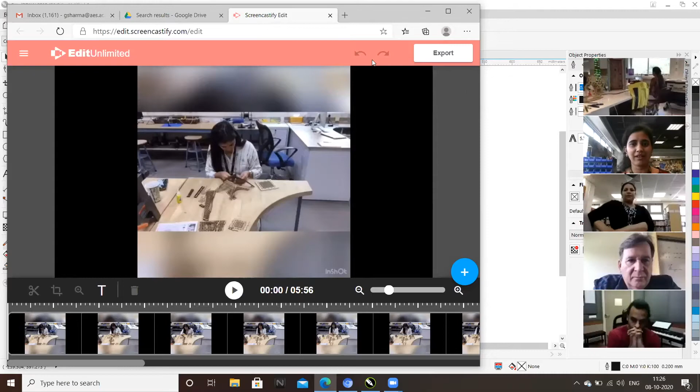Okay, it is visible. Yeah, not to me. Oh, there it is. Yes, okay, yeah, perfect. Let me just... okay, let's start with this one. Can I have this? How to go back? Oh, I need to stop sharing. Okay, then I'll come back, and then I need to focus.

So here, if we focus, I have prepared some laser cutting experimentation with cloth as one of the materials. MDF is another material which we most widely use when we do laser cutting. Then you have polymers also, plastic, to laser cut, and then you can even cut normal paper, A4 size sheet paper. Even different thicknesses of cloth can be used, and even glass can be used to laser cut.

With this Eiffel Tower, it's just 20 minutes of cutting process, and the rest 20 minutes is just the assembly part. But if I had to go prepare the same thing from 3D printing, I'll just show you.

If I talk about these two 3D printed objects, they took at least 1 hour to 1 hour 30 minutes for the white one, and 3 hours 30 minutes for the blue one. So once you're aware of the technology, you need to understand which application the technique or technology will work out best for, considering your time constraints also.

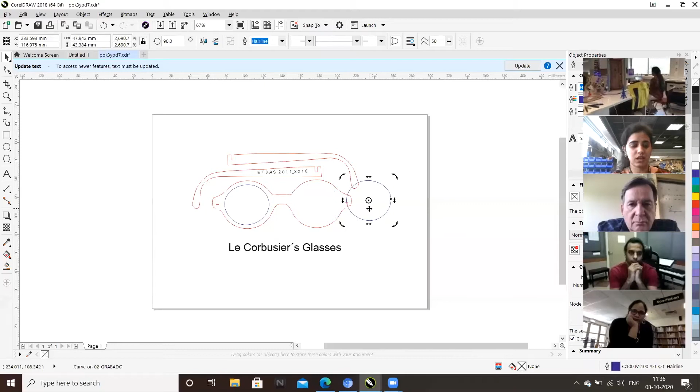Okay, you can just do a normal Control Z, it will come back. Now you will pick your item which you want to cut. When I say cut, I'm interested in the boundary area, so you have to go here and select hairline. Hairline is the instruction which allows you to cut out the object.

But for example, this text, I don't want to cut it out, I would like to engrave it. So to engrave it, you have to unselect the hairline first, and you can give any kind of color to it. For example, where's the color? Okay, let's use any color.

So once you give a color combination instead of the cutter color, it's like an engraving operation has to be done. So for the rest of the items which I want as the outline, we have to select individually and check whether they are hairlined or not.

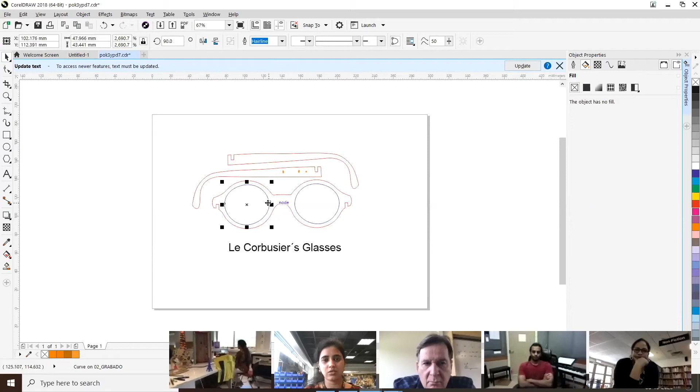So you have to again go back to the pick tool to select and check. Okay, this is also hairlined. This is also hairlined. What else do I need? The text - I don't want to hairline the text, so I have kept it none.

Now this text, if you want to cut it out, you need to give it an outline. Otherwise what will happen? It will get engraved, but you won't be able to take it out from the raw material. So you can have any kind of outline.

Let's have a rectangle. Now again, like a border? Rectangle, yes, border is your cutout.

So the border I have created and it needs to be hairline, but for the text again I need to go to the pick tool. I'll pick this - I don't want the hairline thing on it.

Okay, by default if you are using any text command, it will not give you the hairline feature because texts are by default engraved. As you can see, we don't have that hairline feature available, so it will get engraved only. Engraved means it will give the burning effect on each letter.

Okay, so this file is ready. You have to check this sheet size - this is the sheet size. Now I'll show you the machine bed size.

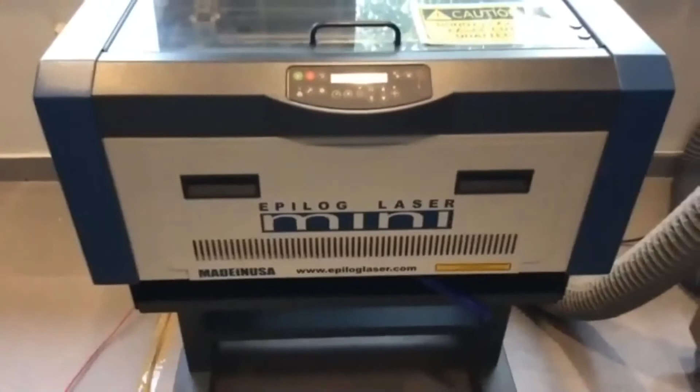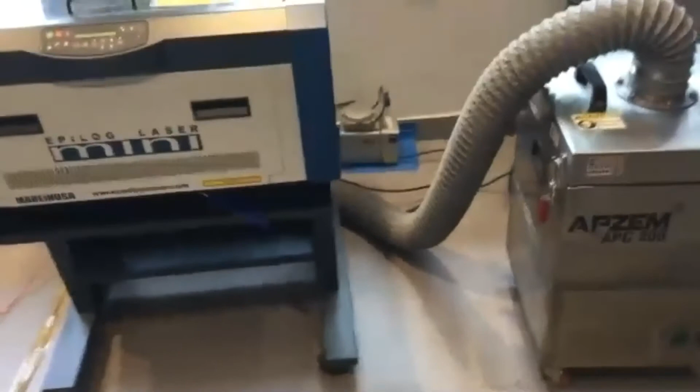So when you are working with the laser cutter, there are three different parts we take care of. This is your main laser cutter where this nozzle part is, from where the laser is going to come, and after that this is the main bed size which will decide how big or small a prototype you can make.

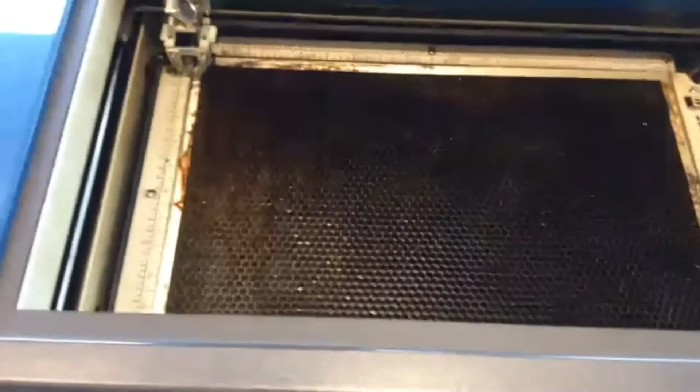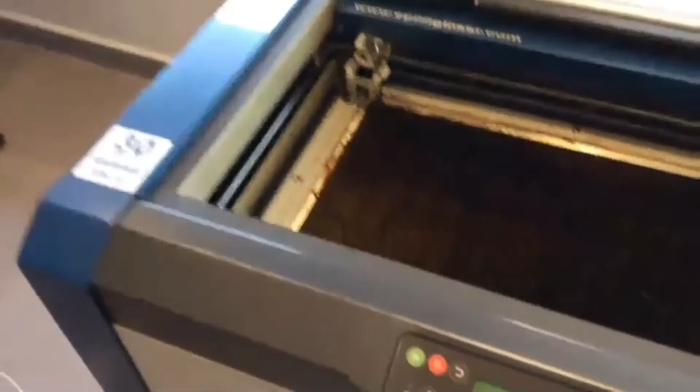Now to run a laser cutter you need compressed air so that you can maintain some cooling air near the burning surface, because the laser is at a very high temperature, so you need to provide continuous coolant. So we are using the compressed air.

Then we need some kind of extraction system also, because when we are cutting, we are actually burning something, so the smoke needs to go out. So this is your extractor, and that is your compressor. That was the whole thing about the machine part.

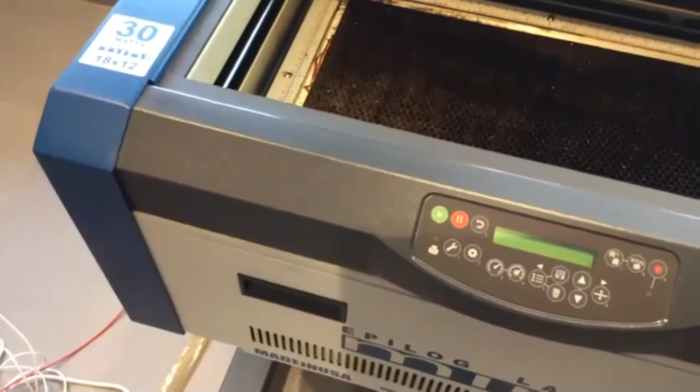Now, based on the bed size, you need to decide the size of the template you are working on in your slicer. Right now the bed size is 400 mm in the x-axis and 300 mm in the y-axis. So I need to consider this while preparing my slicing part. Let me share my screen.

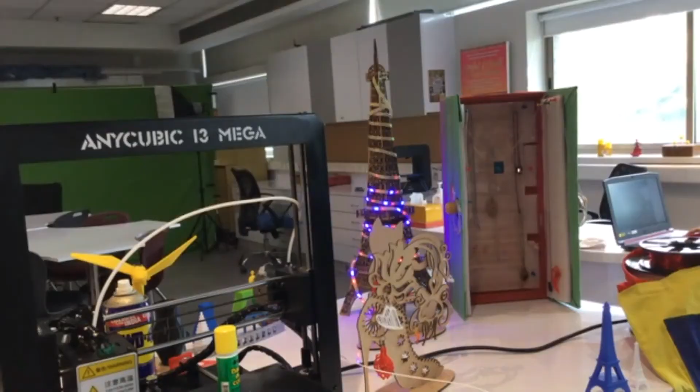This template size needs to be compatible with the bed of the laser cutter. Now how to set that? You just go to your layout, your page setup, and units are mm. I'll put the x-axis as more than 400, I would like to keep 450, and this I would like to keep 350. Rest I will not change. Done. Okay.

Now this is the actual representation of the bed size and the representation of my object where it is going to laser cut. Now all you have to do is give the print command, that is Control P.

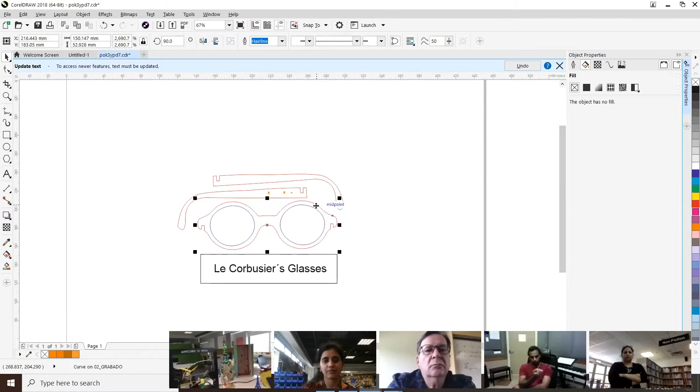From your printers option you have to select the printer which is displaying the driver for your printer. So there are a lot of copies. Why does it happen? Sometimes at the beginning when you are loading the driver, it will show you only Epilog Engraver. Then it's not allowing us to print. So in that case, we delete and install it again. We can delete this already if we are reinstalling it, but that way it never worked out. So by default, it will keep creating the copies. This is something which we are not doing, it's like a bug in the driver which is happening.

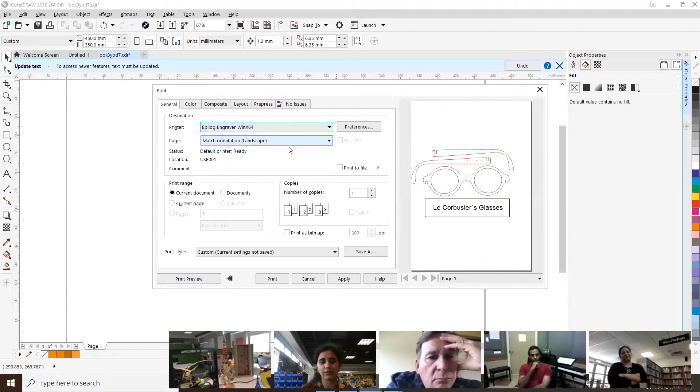So right now I'm selecting this printer, but chances are it will not allow me to print. So in that case, as a part of troubleshooting, in Hindi we call it jugaad, we have to go for copy 1. If that doesn't work, we will go to copy 2. So any of the printers will at the end work. Let me just turn on the printer.

This, I need to help someone. Sorry, I have to leave this. Sorry, I cannot hear you, are you saying something? Yeah, I have to go, I have to help someone. No worries, I'm sorry, I'll be sharing the recording. Thank you so much for your time. Yeah, thank you, thank you. Bye, thank you, Ursula, bye. Bye, Guda.

To assign the operations like cutting and engraving, we will go to the preferences. Now we have various options, like if you want to combine both things, you will keep this. You can arrange and adjust the speed and power. The speed is like the movement of your nozzle. The power is like how intense your laser is.

So this thing you'll keep as low as possible, and this you can vary, because you don't want to reach the highest intensity of your laser. Now when you are rastering, how much burned object you want, accordingly you want to keep the power. So right now I think I would like to keep it around 30, and the speed I can increase so that this task does not take a lot of time to complete. So let's keep it around 80.

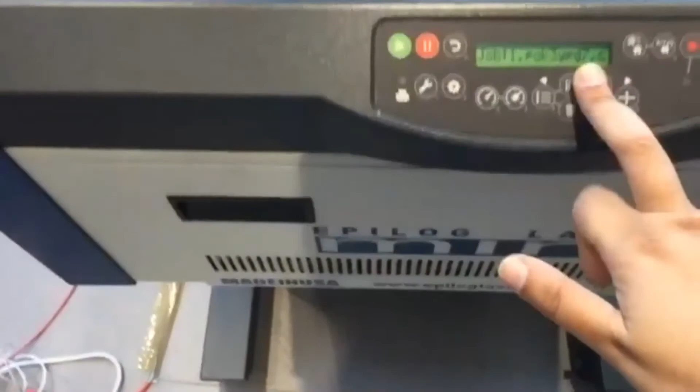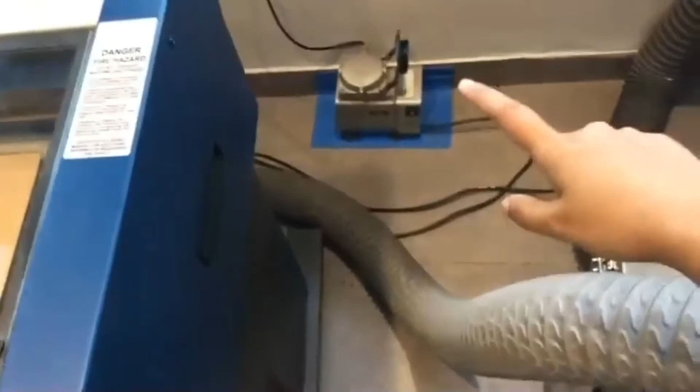Now when you are hitting the print option, let's focus on this. The main thing is you have to check whether your file has been transferred or not. When it is not transferred, you go for troubleshooting, selecting different printers and all that. Once you know your job file has been transferred, you place your raw material, close the door, your extractor should be running, your compressor should be running, and then just hit the play button.

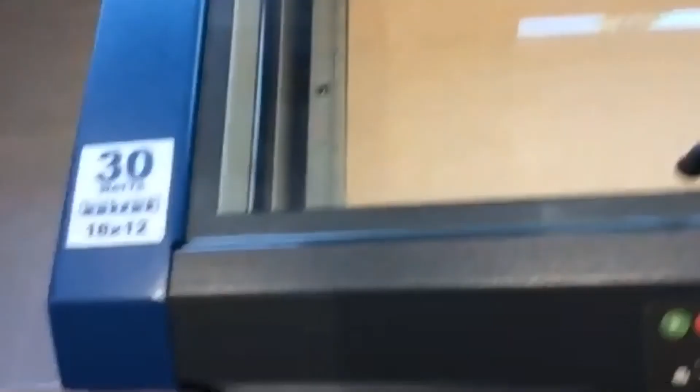Gargi, how thick is that material? I guess this one is 2 mm. Thank you.

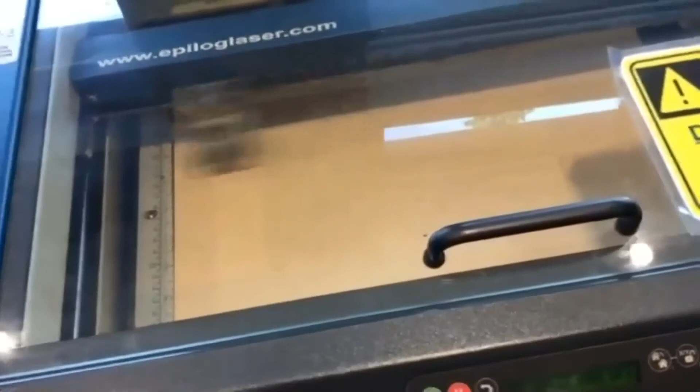So by default, it has selected engraving as the option to do first. Then it will go for the vectoring part, the cutting part.

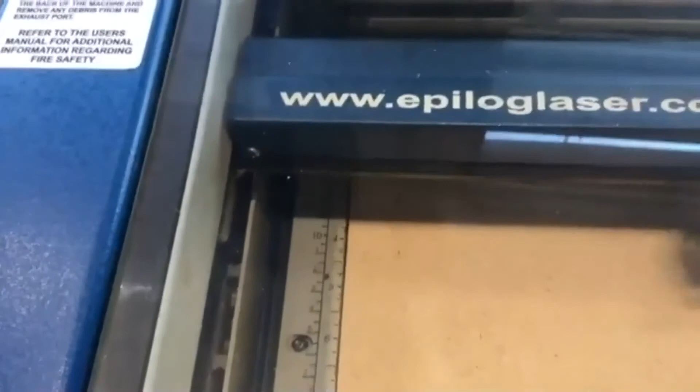Now it's small and it's difficult to visible, and I have to go for one more try. Now in this case, I'm lucky and I can just stop this also. If I stop it here, I can go back, modify my file, and then again give it for print.

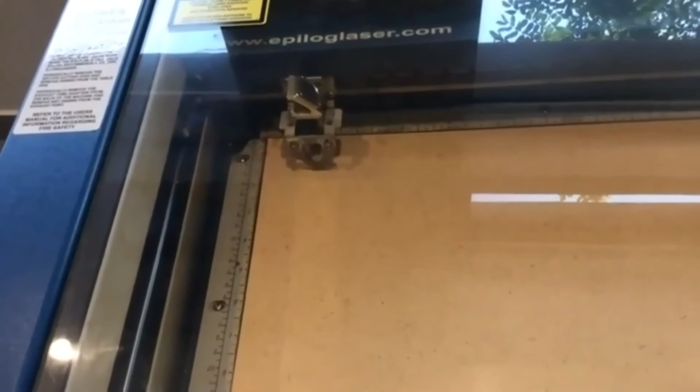But one condition is there: do not move your raw material, because if you slightly change it, the snap points will not be there. So it's better to, or maybe let the cutout keep on going.

I'll just show you. I'll prepare the file with different settings.

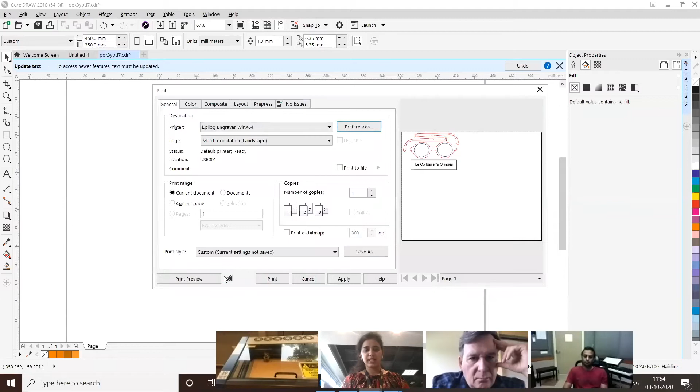Again print. Okay, now we have to first wait, once the cutout gets over. Then we will go and access the other file.

So meanwhile, let's discuss some other design, some other complications, some other stuffs.

Okay, let's open a fresh template. Now, when you are opening a new file, it will ask you the page setup properties. Just keep the same.

Okay, let's try to design something out of CorelDRAW itself. So let's have a keychain. Okay, I would like to have—I'll ask Tim what kind of boundary you would like to have for your keychain.

Oh, me? Yeah, oh, I don't know. Let's see. Overall, maybe a keychain, let's say 30 millimeters by 50 millimeters.

Because of the machine sound, I would request you to just type in your dimension. Oh, okay. All right.

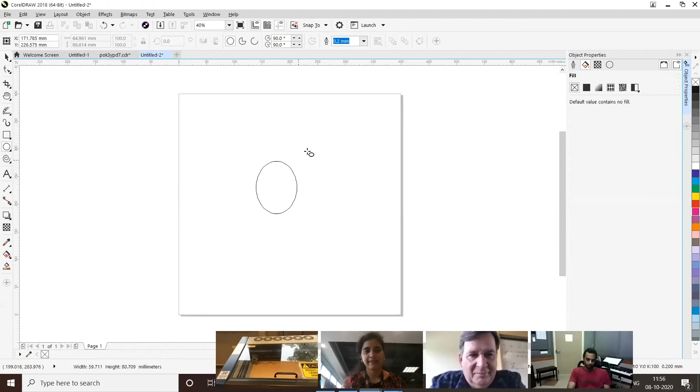Now you said, my bad, 30 by 50. Okay, so I'll again go back, pick the tool. I pick the object, and here it will show me what is the width, what is the length. So let's make this, for example, 30 mm and hit the enter button.

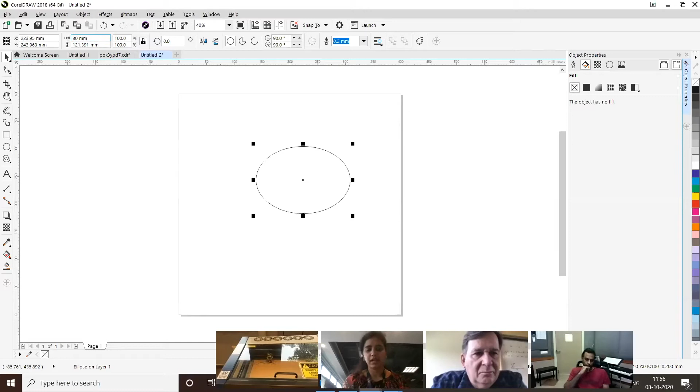Now when you hit the enter, it has proportionately reduced the length also. If you don't want to do that, just unlock this and you can separately give your length. Let's say 50.

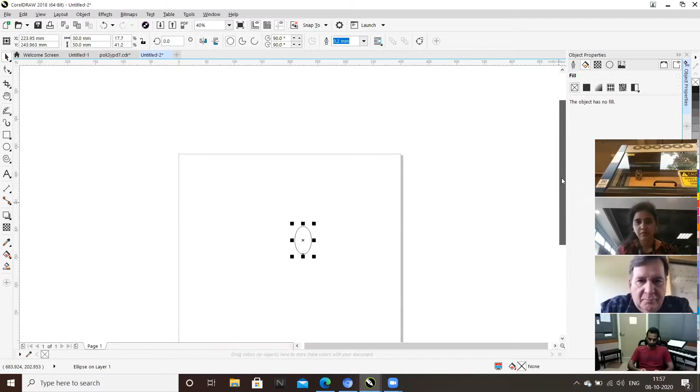Now in this, I would like to zoom this.

I'll keep this on hold because the cut is ready. You people can focus on the iPad screen.

Now on this, okay, now my engraving part has not come. So what I have done, I have sent my file earlier. So I'll just go to the back button and I'll find my file name is already there. Without touching the raw material, just hit the play button.

Now the issue is some part of your cutout is up, some is down. So again, if I go for the rastering part, it might not happen exactly. But let's take a risk. Let's go and take it.

It's happening, and it's as per the requirement.

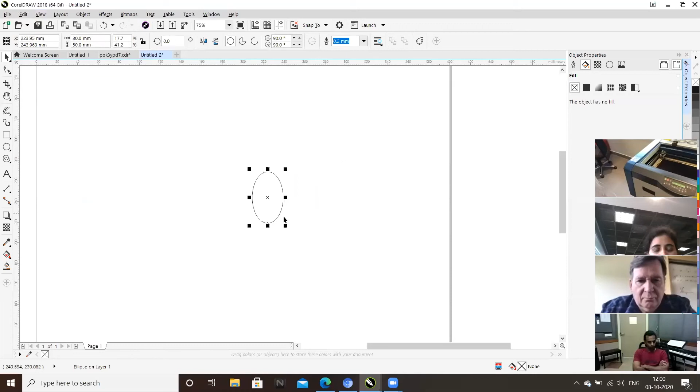Oh no. Okay, now on this one thing is I need a hole to put the key ring, so let's have the hole ready. Now I can just press the up and down arrow key to shift the hole wherever I want, or I can go here and change the positions. Sorry, these are your length and width. Positions are here, X and Y positions.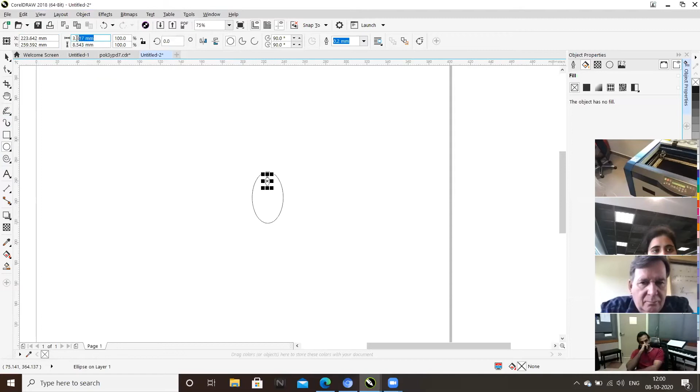I would like to keep the hole, for example, 4 by 4. And I'll again pick the tool. I'll go up.

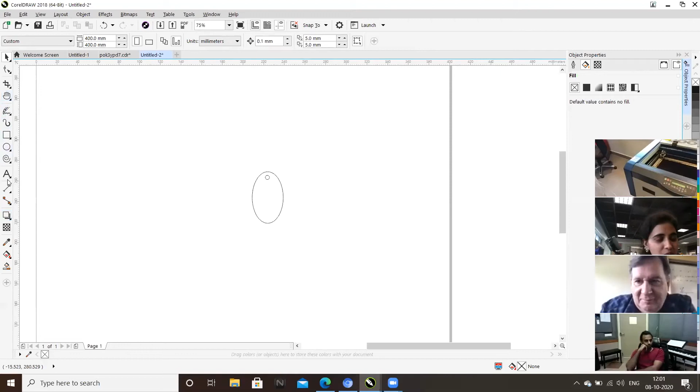Okay, now okay Tim, shall I put your name on your keychain or some kind of design you want? Your name. Okay yes, I'll put your name. I'll go for the text. Let's have Tim. Tim is sufficient, or should I write the full name?

No, that's fine. Okay, now let's reorient this, pick tool, pick this up. Now when you double click, it will allow you to rotate the text. Let's rotate it. Leave it, escape it, again select it, and there is a small plus sign. Bring your cursor there, it shows center, and move it wherever you want.

So how about Tim, what else would you like to have in your keychain? Oh, I don't know, the outline of a heart.

Sorry? I couldn't hear you properly, sorry. No, he said it in the chat. I put it in the chat.

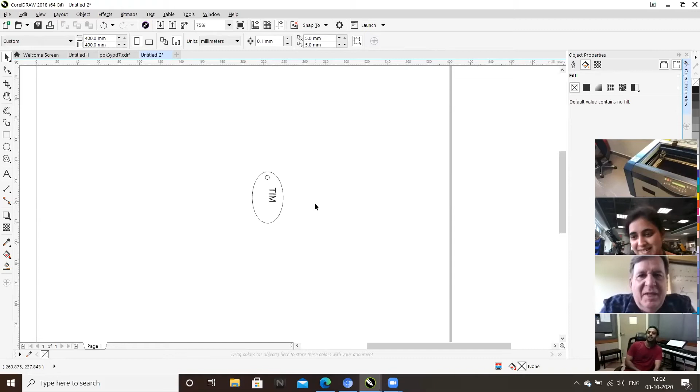Okay fine, let's go and search it for heart. Any particular thing, like what kind of heart shape you would like to have? No, doesn't matter. Doesn't matter? That's easy for me. No.

Let me pick this one. Now I'll just go right click. I would say copy image. I'll come back to the file and I'll just right click and paste. Now I can adjust it.

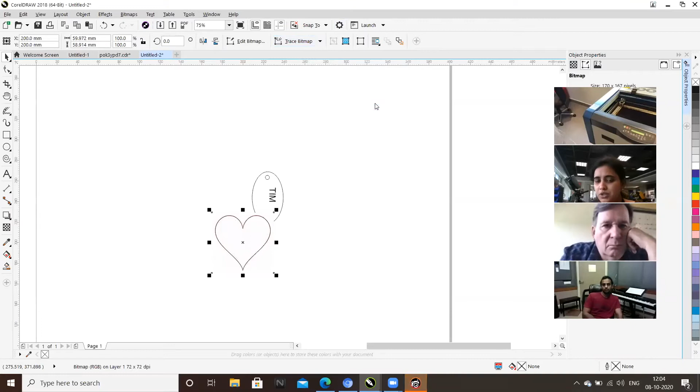Now here comes a little depth when you are working with image files. So if you want to convert an image file into a vector file, a file which can allow the cut, okay you need to go to the edit bitmap, sorry, not edit, that's the wrong option I clicked. Okay, so click this, go to the trace bitmap drop down menu, and then just go to the outline trace, and go to the clip art option. If you do that, it will allow you to convert your entire image into a vector file.

Now here you can control the extent of the vectoring effect. For example, I would like to smoothen it to the fullest, so no changes are there. In detailing, can I have more detailing? No, that's the maximum. I can reduce, but it will vanish.

Okay, this looks great, and yes, I would like to remove the background. Yes, that has already been merged. Okay, then just say okay.

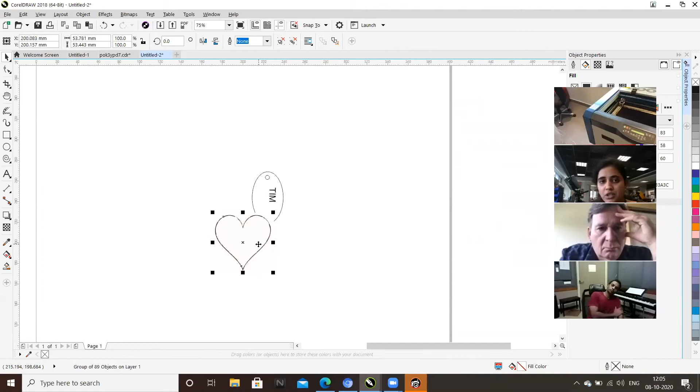Now what will happen, you can give a cut operation. So to give a cut operation, you will go here and pick the hairline thing, so the heart shape cutout will come out. So Tim, would you like to engrave the heart, or would you like to cut out the heart shape? Cut it out, cut it out. Okay, so let's cut, pick out the hairline.

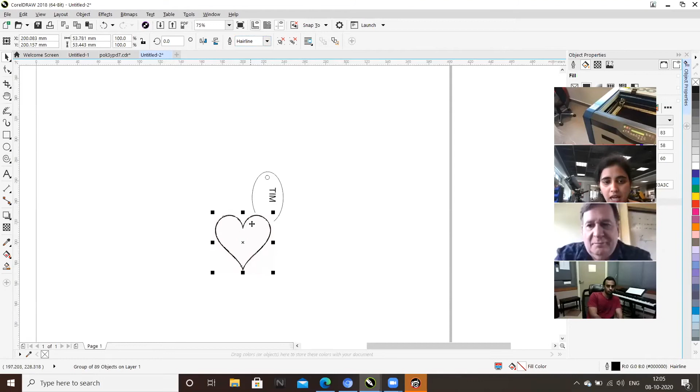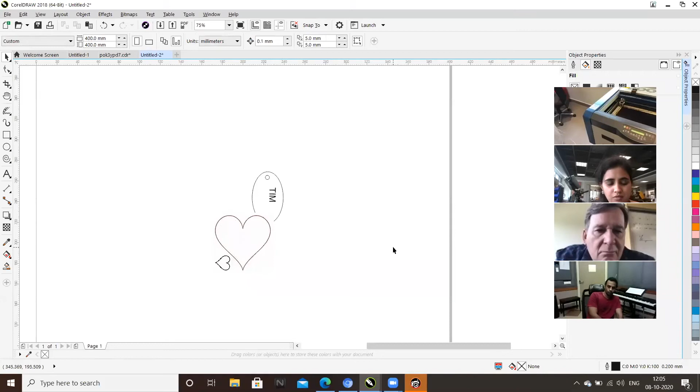Okay, now we can again adjust the size. We can rotate the image. I think twice I have copied it. Or maybe some other thing is there. I believe that's a graphical error because that has been deleted, but it still stays there.

Is this the correct position, or should I move it? Okay, perfect, now the design is ready.

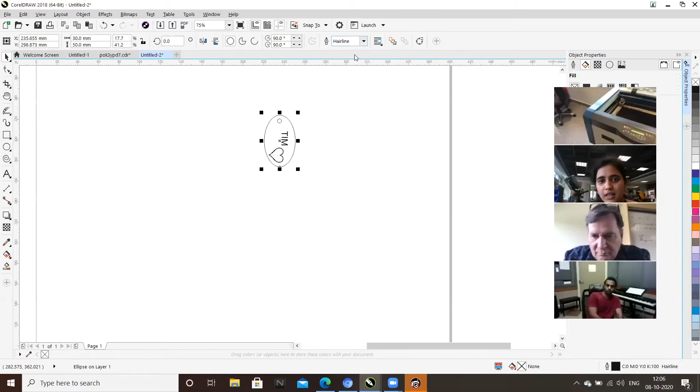This hole needs to be cut, so we will select this, we'll go and put hairline. The outer needs to be cut, we'll select this and go and put the hairline. Then you will select the Tim text. Now by default the text is always engraving. Okay, now this one is hairline.

Okay, now let's see the print preview. Okay, we would like to go to the preferences first. We have a combination and we would like to keep the same combination, but on MDF the speed needs to be slow. Let's have 10, and power let's do it with 80. Last time it was 80. And yes, this thing needs to be 450. Now let's see what happens if I don't make it 450.

Okay, I'll say okay. And by chance this was not, it was not coming here. Now why will it not come here? Let me show you.

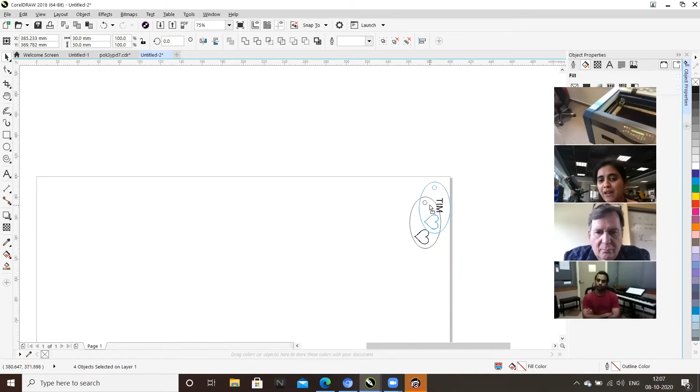For example, I was doing all my stuff here. I go to the print preview. I cannot see my object only. So to see the object, you have to adjust this size 450 as per the template size and the bed size 450.

Always try to keep more than your bed and template size. Now go to the preview option. You can select your object, drag it and give it a good place wherever you want.

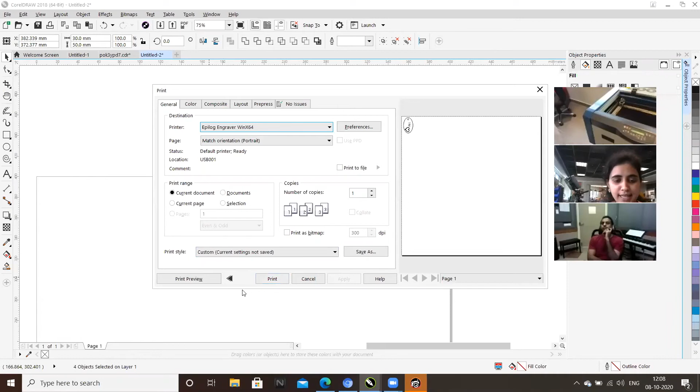You exit this and let's say, okay, let me turn on the laser cutter and I'll wait. Okay, so the resetting has been done. I'll just go and print.

So this time we are not lucky. Our file has not come. I have given the instruction, but the job is empty. So here comes the troubleshooting. As a part of troubleshooting, turn off your laser, turn it on.

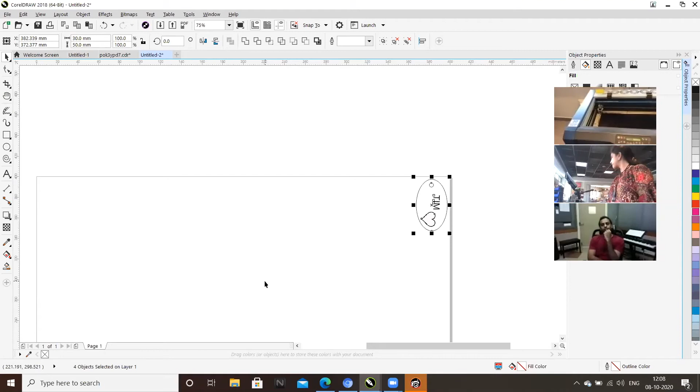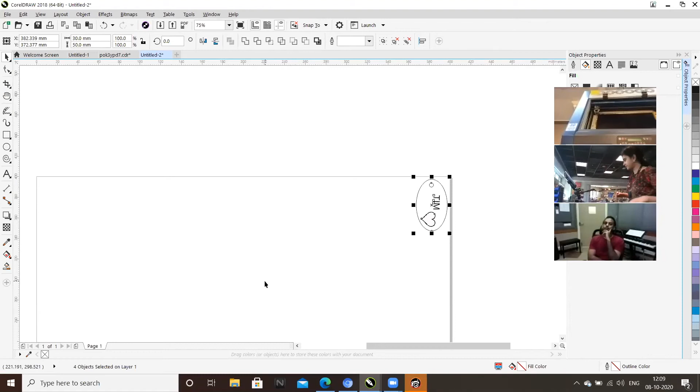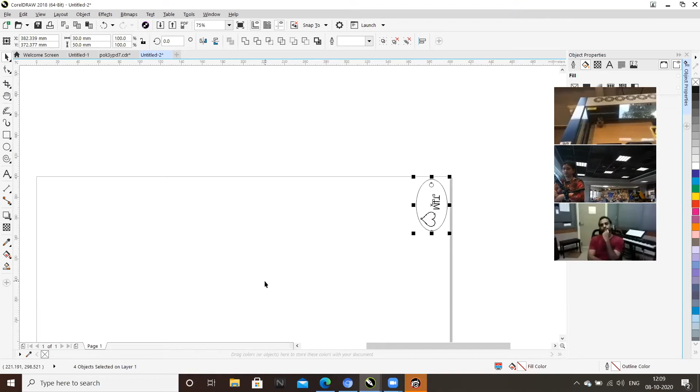Okay, Guna, this time it's you. So tell me, what kind of outline you would like to have for your outer edge? Which outer edge? Can you please type? It will be more helpful to me.

What do you? Yeah, I haven't attended the meeting. Okay, he left. Can you hear me? I'm sorry, I cannot hear you. As long as the process is happening, it's a lot of sound.

I don't want to make it a keychain. Okay.

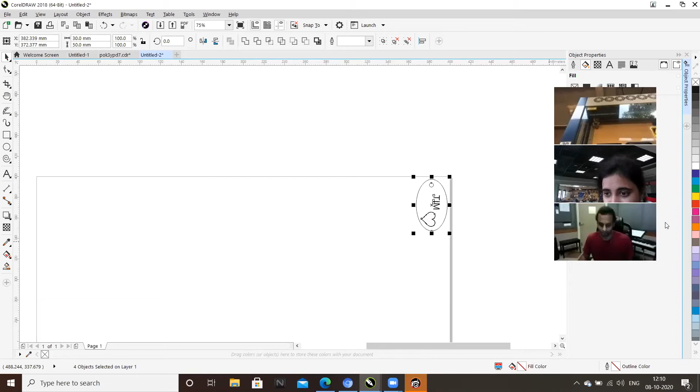Okay, let's take it out. This time the cut has not been proper. So I'll just keep it as it is. And I believe the snapping of the points are correct. I'll put this back, and it's already there. If it's not there in the machine memory, I would have sent again from the computer.

Let's say that's happening. I'll meanwhile prepare. I don't want to make any keychain. Oh okay, mobile holder or a desk stand. Yes we can. So for that, let's go and search out.

So you have to search for mobile desktop DXF files. Oh sorry, mobile. What was that? Mobile stand. Mobile stand here.

Subhana, why don't you search it on open source and send me the file link in the chat? Will that be okay with you?

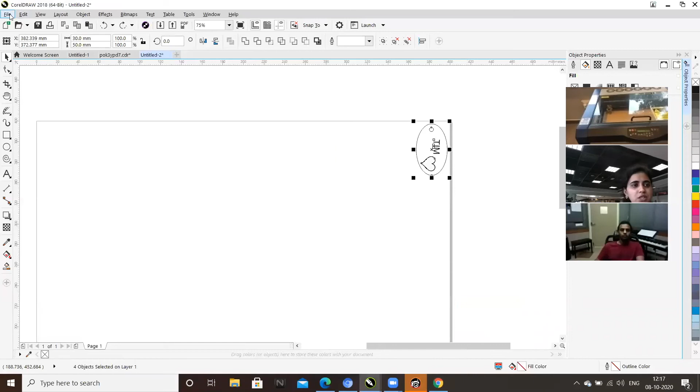Okay, we can download this. But let me check. Create a fresh file for you. Okay, now we would like to import. Okay, this is a RAR file. So we need to extract the RAR file.

Okay, I need to extract it online. So by default, it's a CDR. Great, let's go here. Open.

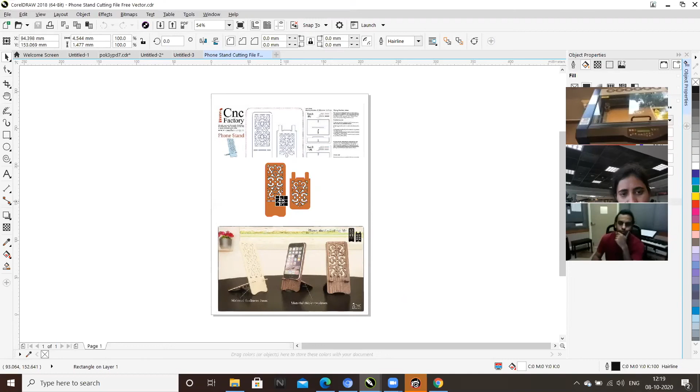Is this a file? Okay, this one is the file. This is the image. This one is an image. Okay, let's do a little zoom in.

Okay, so Guna, would you be okay with this design? Yeah, maybe we can take out. Can you hear me? Hello? One second, let me turn this off.

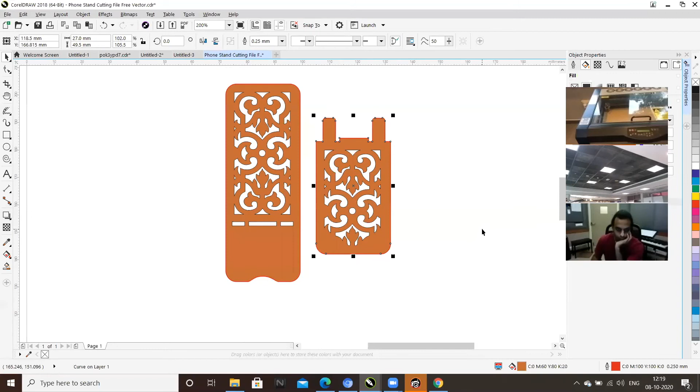Yes, Guna. Yeah, maybe we can take out some of the design elements here and put my name on there. Yeah, sure, we can do that. Yeah, so first, what will we do? Yeah, mhm, you're saying something? No, the taller one will be the stand, and the smaller one will be the behind one, right? We can't see the other part.

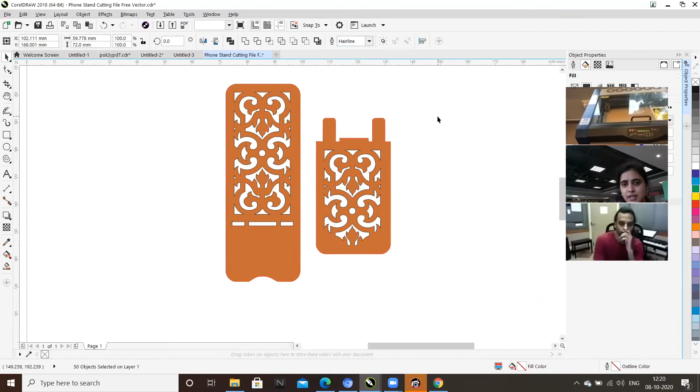So yeah, maybe we can take out all this thing, right, all the design elements in it, like all the cuttings, maybe we can save some time. Okay, so first of all, let's give it an outline instruction, that is hairline. And second thing, you don't want these designs, right? Maybe we can leave some and put my name somewhere. You want to leave some only. Okay, should I leave this much?

No, the bottom one has to be there, right? It's a cutting, so it has to go on the stand. The bottom, 3 lines. Can't take this one out - that's not the design, that's the cutting part.

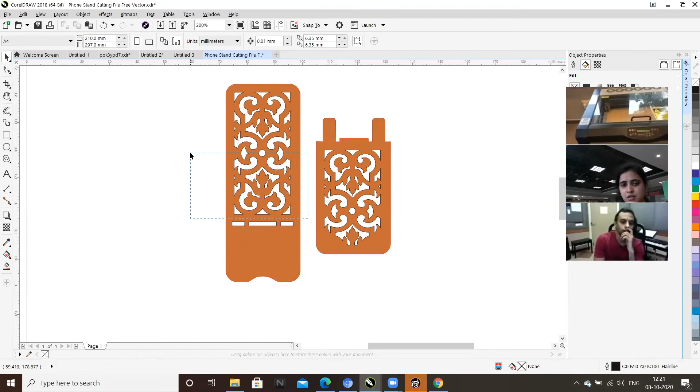Okay, so above that, shall I delete this part? Okay, let me delete this much.

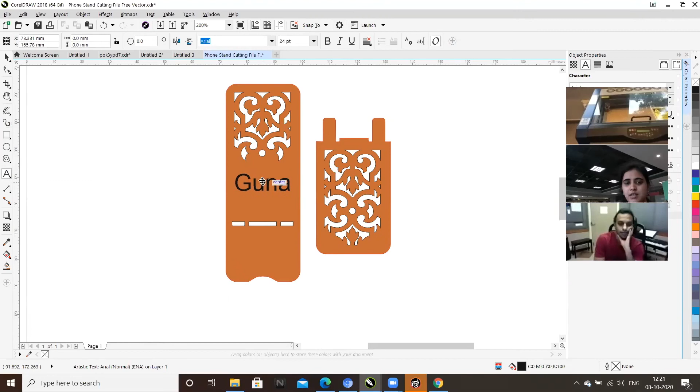Okay, now let's pick your text, let's have Guna - is it single N or double N? No, that's it, that's it. You want it horizontal or vertical? The font here, we can change the font also, right? Yeah, we can change the fonts.

Which one? Maybe the handwriting one will be better. This one? No, ah okay that's fine. This one, yeah yeah.

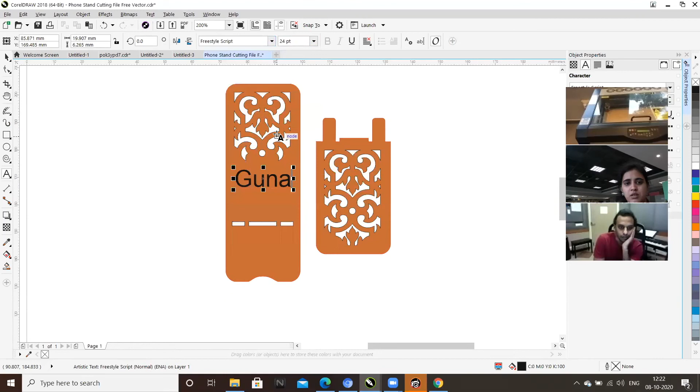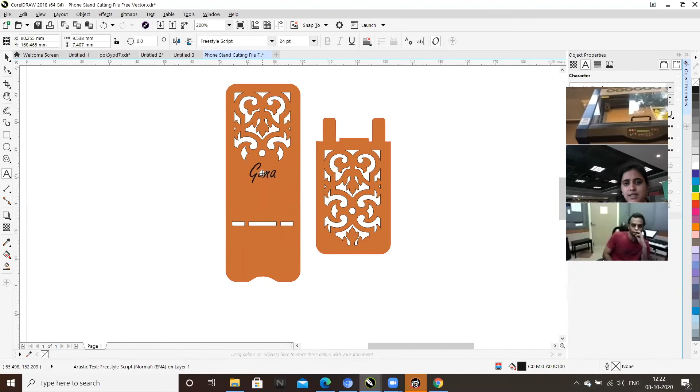Now, would you like it here or in the center? This one is better, right? No, keep it on the bottom only. So when you place your phone, we can't even see my name, right? This way? Yeah, a little up. Yeah.

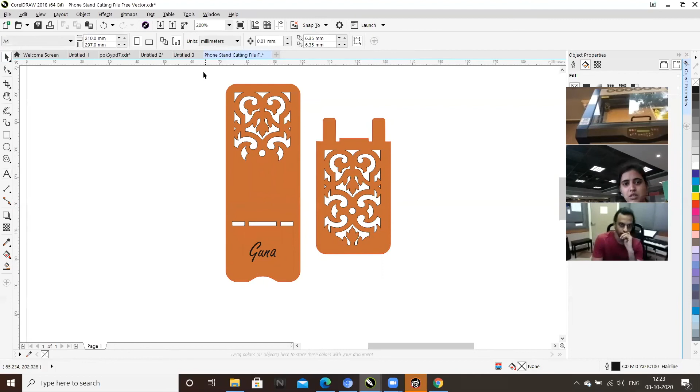Okay, fine. Now rest - I'm wondering why there is the color, because the color means you need rastering, but we don't want rastering. It will consume our time. If I pick white, or if I don't pick only, I'll say no fill. Yeah, that would be better.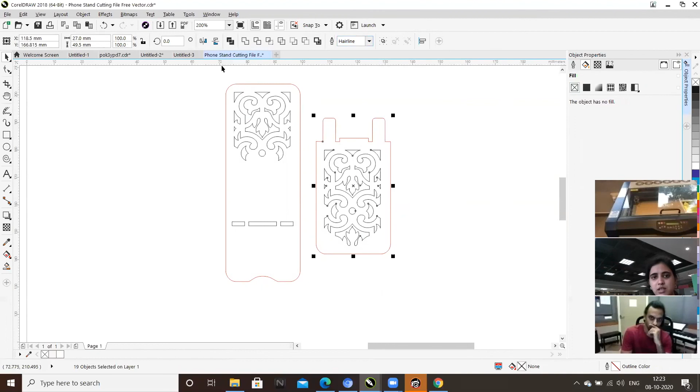So all I'm left with is this body, everything needs to be cut, so it's hairline. Maybe we can take out the designs in the stand part, the smaller one - maybe we can save some time. The entire design part? Yeah, yeah, maybe we can take out everything, it doesn't matter, right?

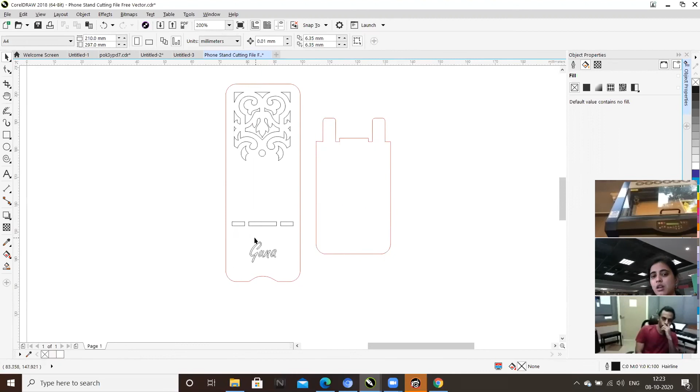Okay, and then Guna is there now. Guna, you want it to be like what we say, vector, or you want it to be engraved? Yeah, engraving is fine, I think engraving is fine. Engraving is fine, so I have to pick this.

I have to make it none. And then in the fill, I need to select uniform fill - no, yeah, uniform is better. And the background - I don't want the background of the Guna to also get burned out, or do you want just the text to be burning out? No, only the text, right? Only text will be fine, right?

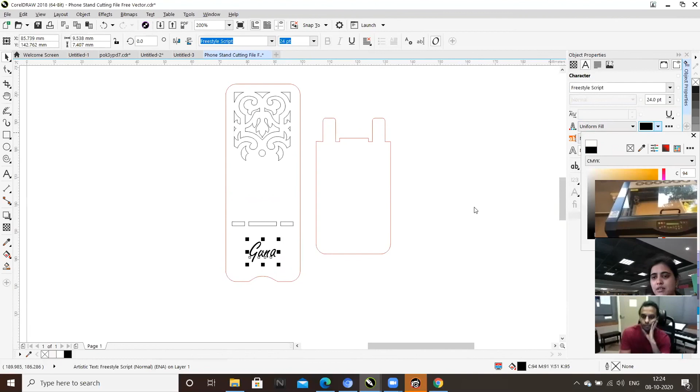Fine, then only - but we would like to see the outlining. So the outlining, we would like to have black. Okay, fine, so our preparation is ready almost. Now before I hit Control P, let's turn it on.

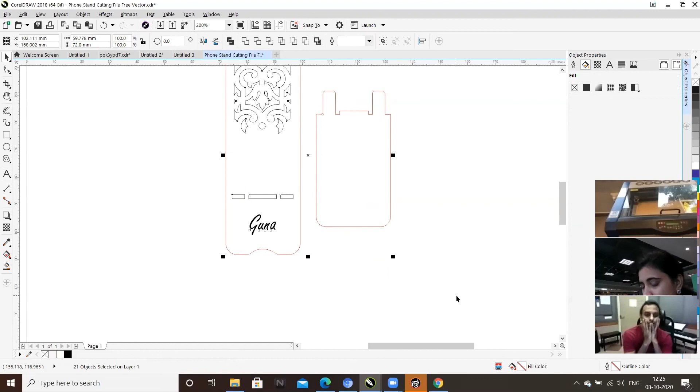So what's the size of this thing? Sorry, the stand - what will be the size of it? Good point, Guna, what would be the size? So this entire thing will be 27 mm. That's too small.

What would be your appropriate size? Let me see, let me bring a ruler.

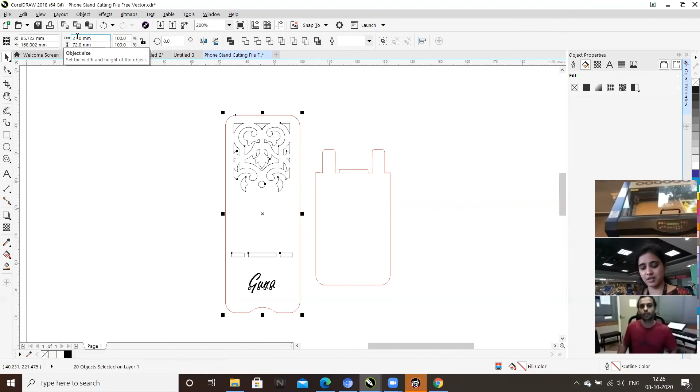Yes Guna, your sizes please. See, I don't have any ruler here. I don't have the exact phone as you are having. So for me, this length of my mobile is like 15 centimeters, and the width is 7.5 centimeters. Okay. Well, I mean, 5.8. So.

Any suggestions? Let's make it like a generic, maybe 5.

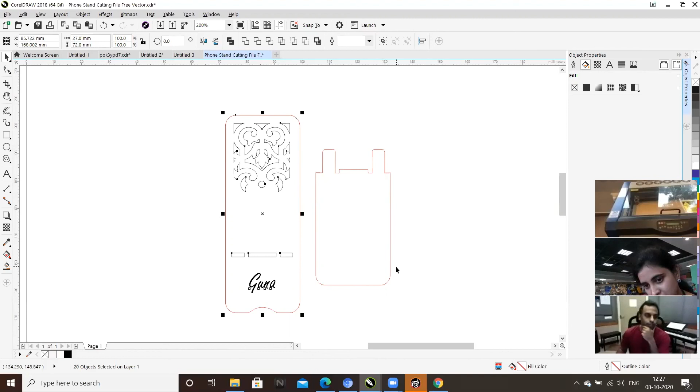So what will be the length of this thing - this one? This length or this length? Yeah, the longer one. Okay, tell me the width of it. Width, here is the width - 72 mm is the width. Length, sorry, 27 mm is the width, and 72 is the length.

So, 27 mm is 2.7 centimeters. It's just 1 inch, right? Mm-hmm. So it will be too small, I think. I think lengthwise we can try 150 mm or maybe more than that. Yeah. No, this will be really small, right? This is in mm, okay.

I'll just check on phone - no, see, 150 is this much. If I keep it 250, that will be too much. Let's have 200, I think 200 will work out.

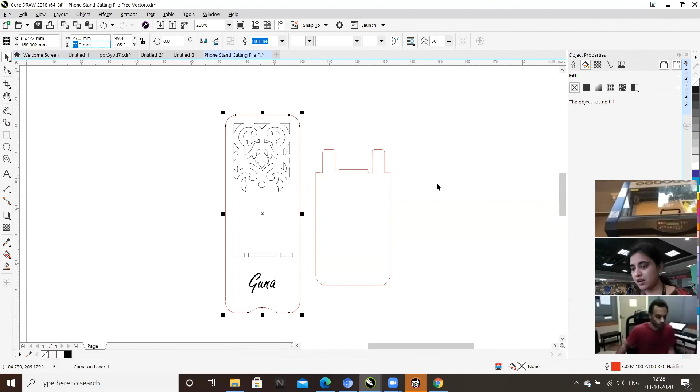Okay, let's do one thing, Guna. As the time is already 12:30 and I have a next meeting also, so you prepare the size with you. You will share the size with me, and then you will come here and do it on your own. That sounds good? Okay. So thank you so much.